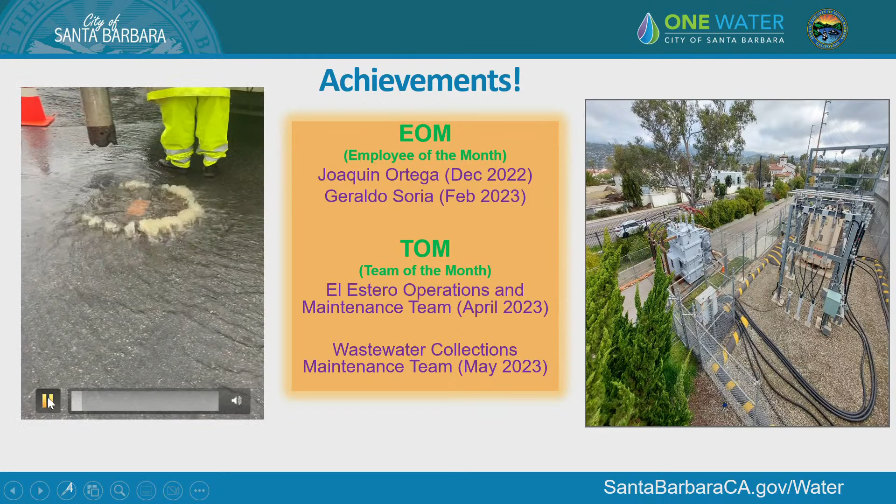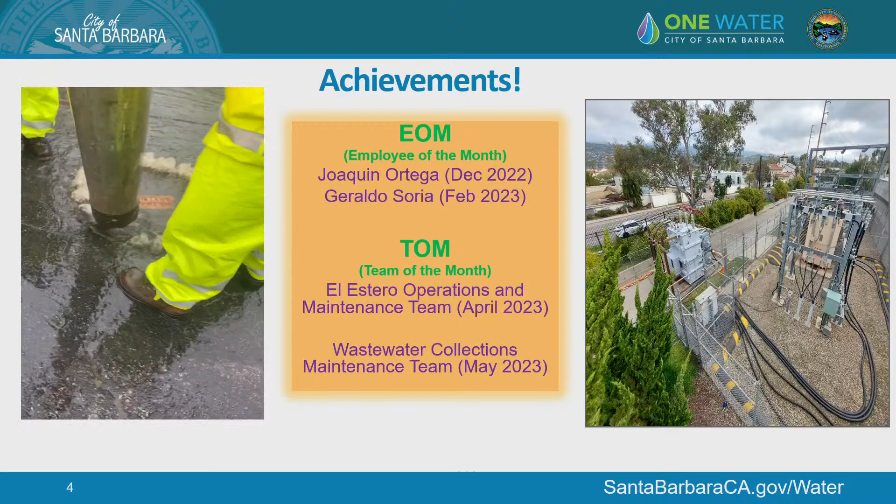Also, what we celebrated in May was a lot of the collections team and what they experienced over the three months of consistent rain. This is a video of what one of our storm drains looked like on January 9th, showing what they had to deal with when the De La Vina Creek, right next to De La Vina and Vernon, was overflowing. We were getting impacted, and our crews were out there every single day making sure we vacuumed up everything, any kind of discharges—but mostly at that point it's just rain flow.

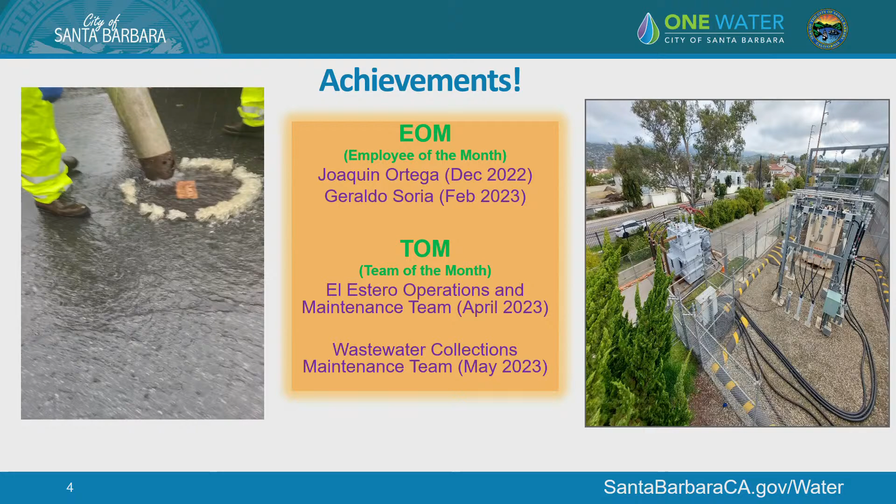All right, so now I will turn it over to Thomas to speak about our wastewater treatment. Next slide, please.

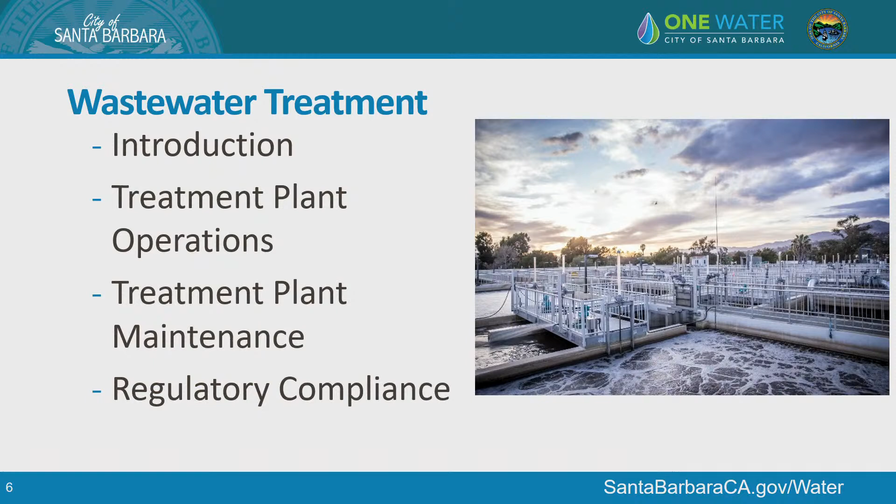The presentation today, I'll be covering a brief introduction, talk about a little bit of our operations and maintenance programs, and our regulatory compliance.

So we went over the treatment process diagram last year. I don't know if I want to spend too much time going over that again, but I just got to tell you, that's a great diagram. I mean, absolutely go over it, because when I got to the report and saw that, I just went, wow, I love that diagram. Everybody needs to understand what happened, so please. Okay, I'll go over it then.

This is actually a modified version of our main SCADA screen, and the operators use this to interface with our control system every day. We've just cleaned it up a little bit, removed a lot of the numbers to make it more clear for the presentation.

Across the top of the screen, going from left to right, is the liquid train of the treatment process. We have our influent pump station with our headworks bar screens, where we remove all the inorganic and trash material before it comes into the plant. Then it goes into our grit chamber, which is an aerated tank that helps remove very fine silt, gravel, and seed-like material that our aerobic and anaerobic bacteria cannot digest.

Then it gets into the treatment process and goes into our primary clarifiers, which are just settling tanks that allow the heavy material to sink and the light material to float. With that, we can remove probably half the material coming into the wastewater plant.

None of this would happen without them, and I'm just really thankful.

We've had a lot of changes in our maintenance team this year. We had a promotion for a new maintenance supervisor. With that promotion, he vacated his planner scheduler position, so we hired a new planner. The new planner vacated a technician position, so I had to hire a new technician. So there was kind of a progression of vacancies, and finally this last week we got back to full staffing in our maintenance team. I'll talk a little bit more about how that's affected us later in the presentation.

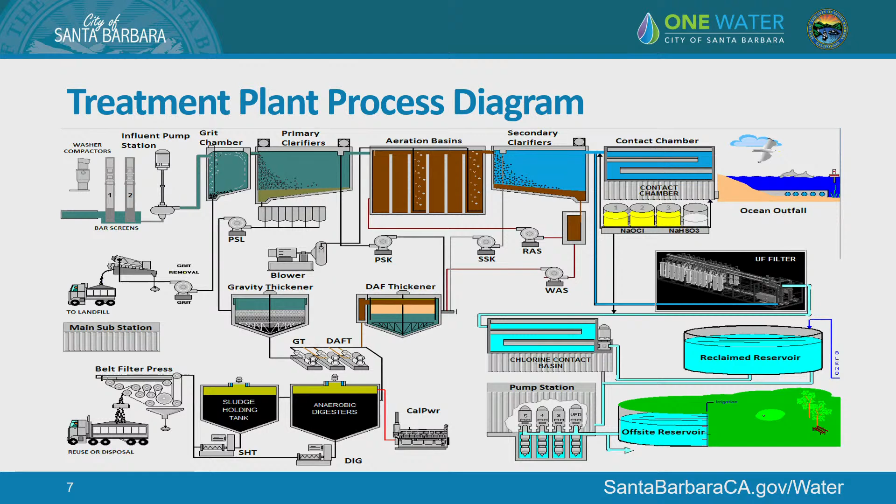So you can go to the next slide. We're on slide 8 now. In addition to operating and maintaining the treatment plant, the maintenance group is responsible for operating and maintaining the 7 lift stations in the community.

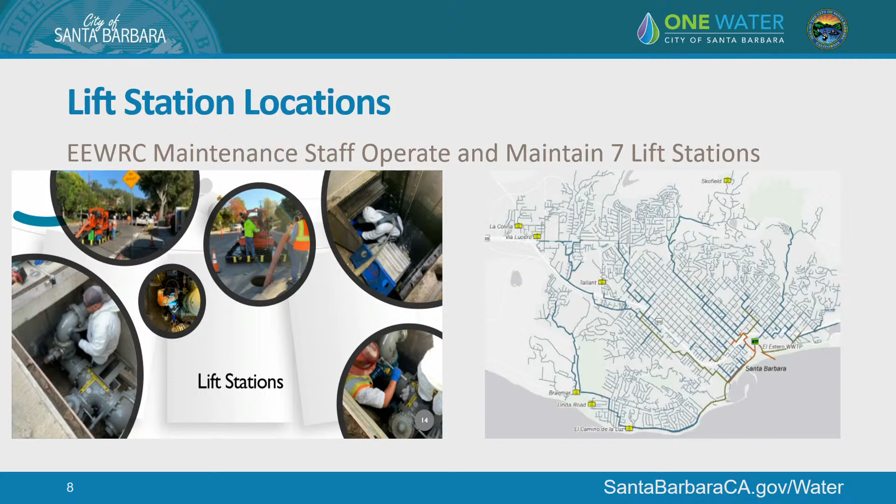Some of these are as small as a 4-foot little wet well in the Samarkand neighborhood, to the Braemar pump station down near Arroyo Burro, which is our biggest lift station, with 2 12-inch pumps there.

So we've seen very high strength solids coming into the treatment plant, and while we are designed for 11 million gallons per day, we're right now only receiving about 6 million gallons per day. I was just looking at a comparison for the first quarter of 2023, that was July through September of 2022 - we treated 5.84 million gallons per day. This same time this year, we're up to 6.21. That's just because we're still getting some infiltration and inflow into the collection system, which, as long as it's not overusing my capacity, is good because it helps freshen up the wastewater a little bit.

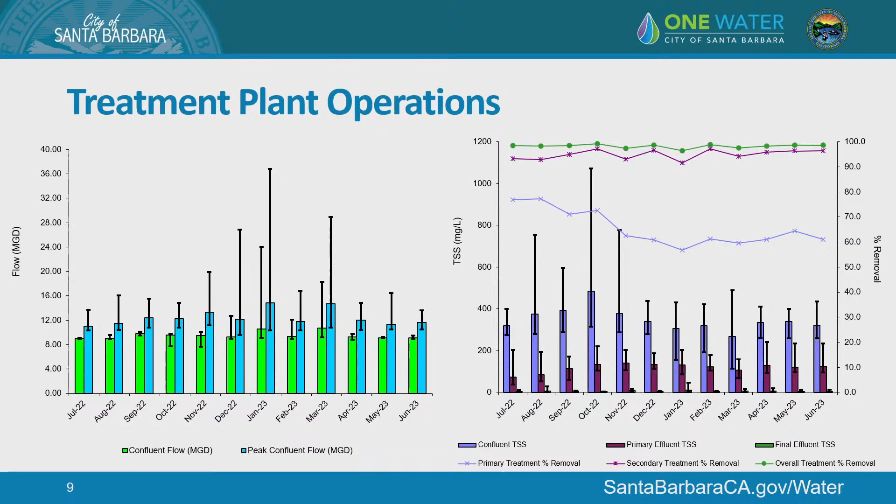Next slide. So with these declining flows resulting in a more concentrated influent stream, it makes the wastewater more challenging to disinfect. Our entire treatment process is physical and biological, with a small chemical portion at the end for disinfection. When we have septic influent, which is anaerobic, it changes the constituents of the solids to be more dissolved and harder to digest. It makes our treatment process more difficult, resulting in us using more chemicals, more energy for air, and sometimes water quality issues.

So one of the things we attempted earlier in Q2 was a nanobubble pre-treatment pilot installation from a company called Moleaer, and they're on like the cutting edge of technology with this. Unfortunately, our pilot started in November, and with the rains in January, it completely changed our operating conditions. So our pilot project, we were not able to get really statistically significant results - we had too many process control changes to make broad assumptions on the effect of their treatment process.

So we are still in conversations with them. There are a lot of other agencies in the nearby community and in the greater state that are also communicating with them, because we are not the only ones dealing with this hard-to-digest, high strength influent flow issue.

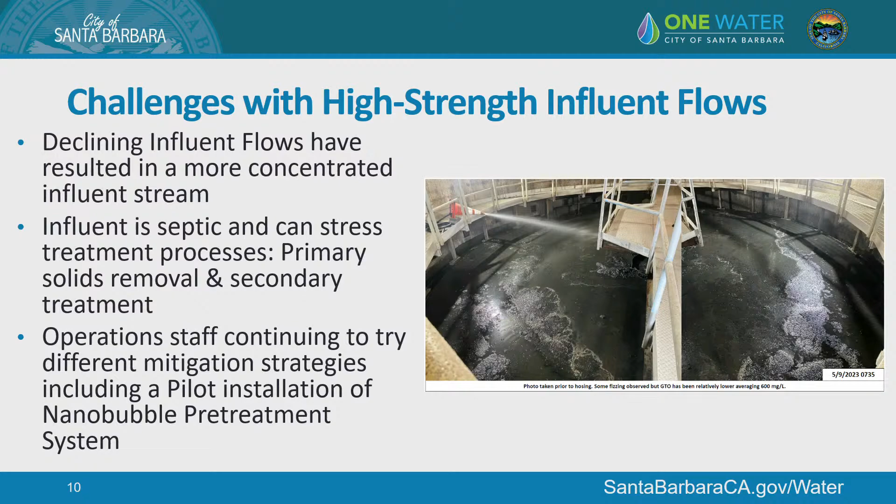I had a question about mitigation strategies, and this might be a totally stupid question, but are there options to blend either recycled water or the wastewater effluent with the influent to dilute it, or are they dilution strategies at the beginning of the process?

Yes, we actually have a secondary effluent return system, thank you for bringing that up. It was installed in the 2019 upgrades project, and that was more of a hydraulic mitigation strategy because of our very tight footprint at El Estero. We don't really have room for an equalization basin to help balance these flows. At night we return up to 3/4 of our flow back to the headworks to equalize that flow. That does help reduce septicity once it's inside the plant, but it doesn't help the flow coming into the plant. So there are some emerging technologies we're keeping an eye on to see if we may be able to mitigate and improve this wastewater condition before it gets to the treatment plant.

Thank you, next slide please. So this is just from the county's hydrological webpage. I think I was opening this tab 30 times a day during the winter just to see what was going on. But we could see, this is from the county building, we had that January 9th storm, 6 inches of rain in Santa Barbara. We can go next slide.

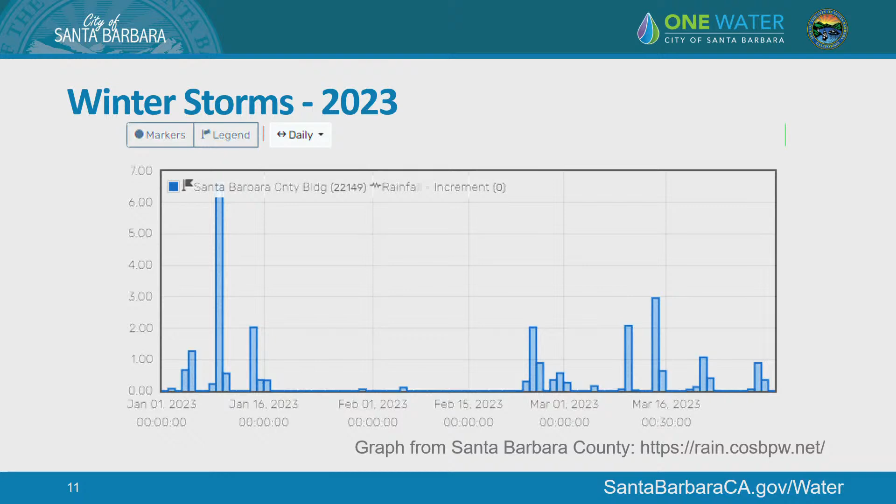So in preparations for these winter storms, our collection system is a sanitary system, so we're not a combined sewer system. We should not be seeing significant flows, but unfortunately we do have some I&I issues, and those result in a lot of concerns for us.

We are right next door to Laguna Channel, so you can see in the middle picture that's one of our flood walls. This is a technology that's used in Europe and other areas, a deployable wall that we use to protect our low-lying areas of the plant, like our emergency generator building, so we really don't want it to flood. So we preemptively load up the flood walls.

The bottom left picture shows our clarifiers during a high flow condition, where you can see the effluent flow goes over those V-notch weirs into those troughs. That's a picture of us during peak flow. The troughs are completely submerged, and we were at our hydraulic capacity for over 12 hours. We had all 4 of our influent pumps pumping every gallon of water they could out of the sewer system for 12 hours straight, and we had to restrict flow coming into the plant because our station was starting to flood inside the pump station.

On the far right, we also have issues with some of our lift stations. That's at Linda Road on the Mesa, and that station's pumps were not able to keep up with the incoming flow. This is something we've been able to work with the collection system crew on, and we gave them notice that this station was really having issues maintaining flow in the winter, and they did some smoke testing earlier this year. I hope I'm not stealing your thunder, but they do the smoke testing to look for illegal connections that might be contributing I&I to our pump stations, because those pump stations are our bottlenecks in the system. Luckily, they're only about less than 10 to 15% of our flow coming into the plant, but in those localized areas they can act as a bottleneck.

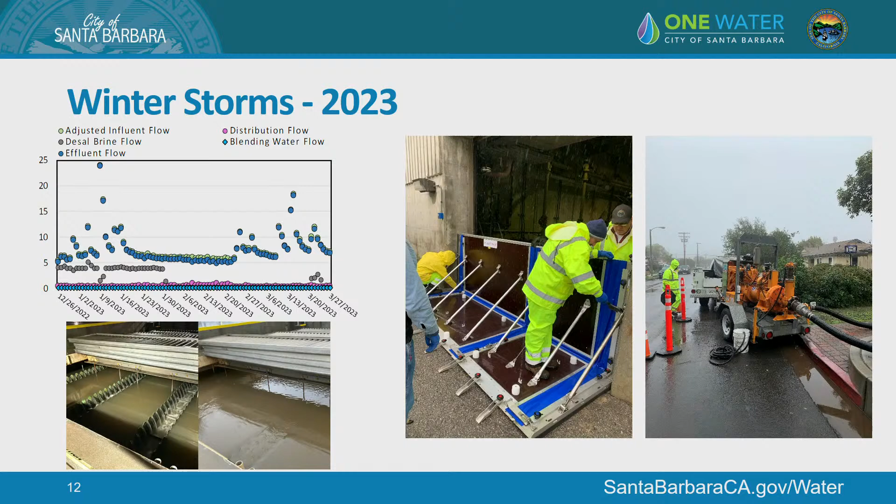You can go next slide please. So Amanda kind of touched on our Edison transformer failure already. What she didn't fully lay out was that when this went down on March 9th, we had been experiencing blower issues for the week before, 3 or 4 days before. Our aeration blowers are 900 horsepower electric motors that provide the air and oxygen that drive our biological process, and 2 of our 3 blowers failed. Our first blower failed earlier in the week, and our second blower failed on Thursday. So we were troubleshooting this thing, trying to figure out what's going on. It was giving us an electrical fault we'd never seen before.

In hindsight, we realized it wasn't the equipment that was failing, it was the source power that was dirty, and the blower was failing to protect itself so it wouldn't get damaged. Once the power completely went out, we put 2 and 2 together and realized this isn't our equipment failing, this is dirty power coming into the plant, and it was the death throes of the transformer that was causing those failures. So we were on our 2 megawatt diesel generator for 6 days straight, using about 1,000 to 1,500 gallons of diesel per day to power the treatment plant, to put that in perspective of that relative energy use.

The first night was very stressful. We had some lack of communication with Edison, but once we got the right people in touch with each other, Edison was very supportive, very helpful, and they were able to get us a replacement transformer in 3 days on site, and it took them 3 days to get it connected.

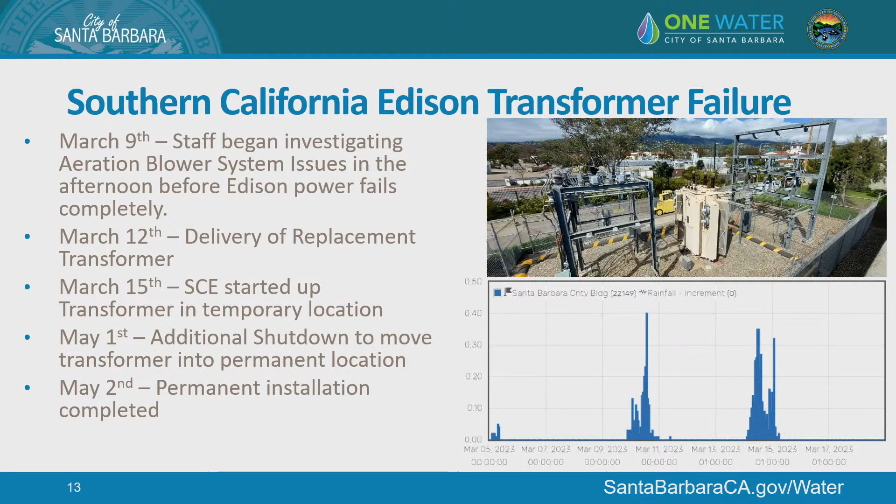If we can go next slide and just show this. I have some pictures of the delivery of the transformer coming on site. I believe it was at least 20 tons of weight, so that's an oversized load. We had to do emergency permits with Caltrans, so we learned a lot going through that. That's not something we do every day.

And then Edison's crew had the most specialized forklift I've ever seen. It's one that the whole thing extends, and our forklift has a heel on the forks that's maybe 1.5 inches thick. This forklift was 6 inches thick of steel to pick up that heavy device, and their crew was very large. They didn't always know each other - they were all from different departments.

But it all came together extremely quickly, because we had rain during these events, and you cannot do high voltage electrical terminations in rain. So Edison was shoehorning these repairs before and after these rain events, and even ocean fog is too much humidity to do these high voltage tests. So we were very fortunate that we were able to get the transformer back online and get off our generator with no harm, because that generator is also a 25-year-old generator.

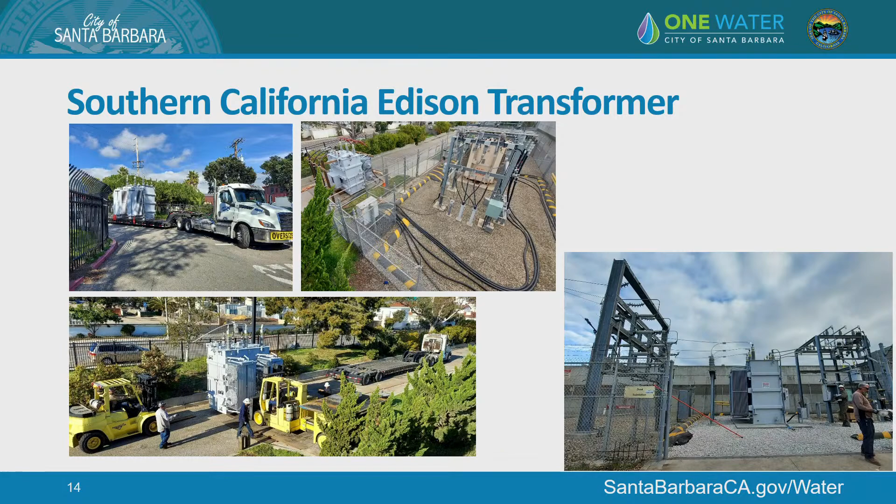A question for you. So we have backup generators that run on diesel. Can we run those indefinitely? We can run those as long as we have an emergency condition. We have a permit with the Air Pollution Control District, and there's a limit to hours for non-emergency use. But when we're in an emergency condition, we can run them as long as we need to.

Perfect, thank you. It was interesting last September when we had that heat wave, you may recall that. There was a temporary time period where they did suspend the limitations on generators, because they wanted to try and get as much as they could off of the electrical grid so they didn't bring the whole thing down. But it's a very unique circumstance. Typically we sparingly use the backup generators - we do our testing monthly, and then of course when we have an emergency situation.

Very infrequent use. Do we have a backup to the backup? No, that is exactly why staff were there 24/7 when we were running the generator. We had full-time shift coverage because there was no backup to that. And that's why it was fantastic - our Public Works Director was heavily involved in that too, and we got the upper SCE folks involved. Once they understood the gravity of the situation, it was quite impressive what they could mobilize. So it was helpful.

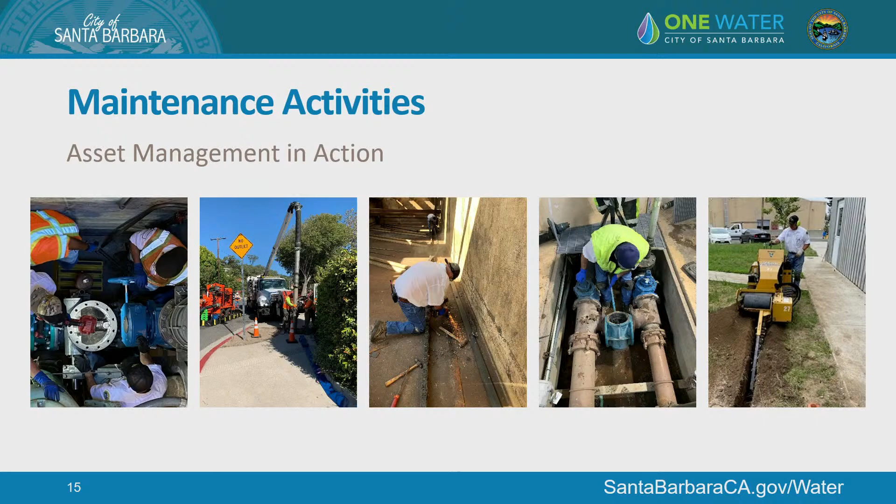And then on the far right there, we're running a new recycled water line, and this is something that we normally wouldn't have done in-house either. We're running a new line to one of our buildings to try and move some water that was in potable/industrial water to a recycled water use to try and aid some more conservation efforts. So we can go to the next slide.

Just briefly on our compliance issues, we had 2 exceedances of our permit limitations in fiscal year 2023.

One exceedance was an effluent coliform daily maximum limit, a biological test that didn't correlate with any other process parameters we could see. It was a 1-day spike and everything returned to normal the next day, which is a challenge with bacteriological tests because you're growing bacteria in the lab and seeing what responds. We suspect there might have been some contaminant, but because we couldn't pinpoint anything, we did report it as a violation.

The other exceedance was on the January 9th rainstorm. We exceeded the total suspended solids we were allowed to discharge by weight. We met our concentration limit, but because our flow was over design capacity—we treated 21 million gallons per day versus our normal peak design flow of 18 million gallons per day—we exceeded the total suspended solids by pounds for that one day, even though we met our concentration limit.

We also had two monitoring violations this year, both with recycled water. We've had a consolidation of our permits recently, which caused a couple hiccups with sampling frequency and analysis frequency. In Q2 we grabbed the sample but didn't analyze it, and in October we had a fouled sample tube. So we've had some new retraining opportunities to get our operations and lab staff working together better.

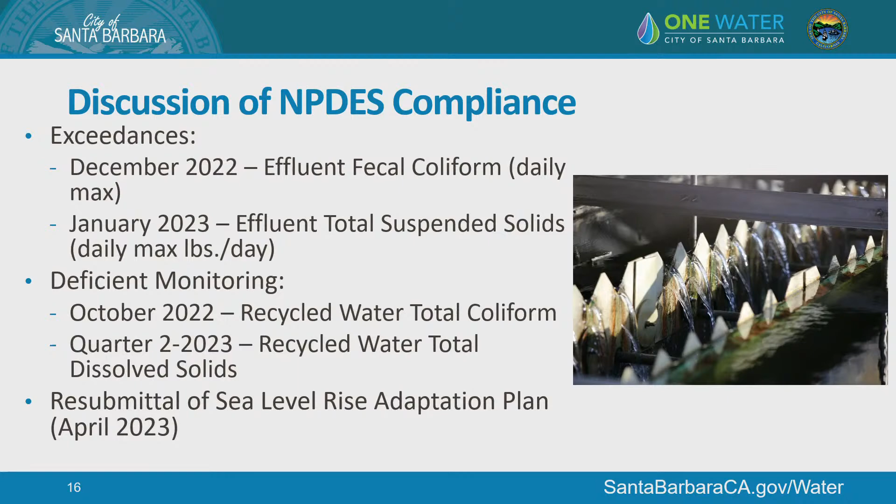Lastly, we resubmitted our sea level rise adaptation plan in April 2023. This was due in April 2022, but the state required an update of our local hazard mitigation plan, which was not previously submitted because it was not complete. Once we got that updated local hazard mitigation plan, we were able to resubmit the report and meet every requirement within that permit.

Next slide, just a preview for the fiscal year coming up. We've started replacing our electronic O&M manual, which has all of our SOPs, vendor manuals, process descriptions, and troubleshooting guides. It's really the Bible for the operations staff.

That manual was on a 10-year-old software platform. We worked with IT this year to select a new software, and we've moved to the city's internal website. That's ongoing this fiscal year.

We're replacing the membranes for the recycled water. I have a delivery estimate of November, and we'll be replacing those in-house. We bought the modules with capital funds, but the installation will all be done by city staff.

And then lastly, we're continuing our SCADA server and workstation upgrades, and hopefully I'll have an even better, cooler graph for you guys once our screens are all redone. Thank you.

Any questions on the treatment side before we move on to collections? Thank you, that is an incredible presentation.

I just have a question about the biological processes, when you have alternating drought and severe storms, climate change and more rapidly changing extreme weather events, and also the time of year when we have many more visitors versus other times—fluctuations not just within the week, but seasons.

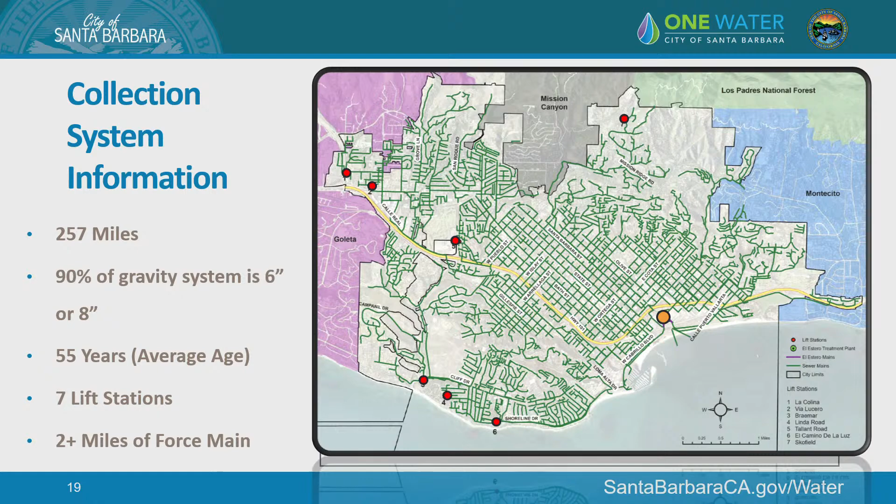Brief overview: 257 miles of gravity system, mostly 6 and 8 inch, so very small, and our 7 lift stations. We are also a very aging system, so a lot of cracks, rehabilitations, and repairs are required. We have right now 2 miles of force mains, mostly from our lift stations, meeting up with our gravity system.

This year, we had an unfortunate year with all of the rains. The majority of our overflows were from January 9th. However, we did have some issues with the team.

At the beginning of the year, we did not have enough staff, but throughout the year we were able to gain more staff and really train them. They got a lot of training between January and March, which was good for the new staff. You could tell in the data that in the beginning we had a little more spills because of the short staff, but now you can tell we're getting our staff up to speed, cleaning more, and addressing more items.

We did meet our goal of scheduling pipes at an assigned cleaning time, hitting 84% of that. A lot of our pipes also got cleaned during those storms, which helped out quite a bit.

I would also like to highlight our fats, oils, and grease program. Our pre-treatment coordinator does a fantastic job working with a lot of restaurants in the downtown area and all over Santa Barbara, getting them into compliance and reinspecting them, which helps quite a bit.

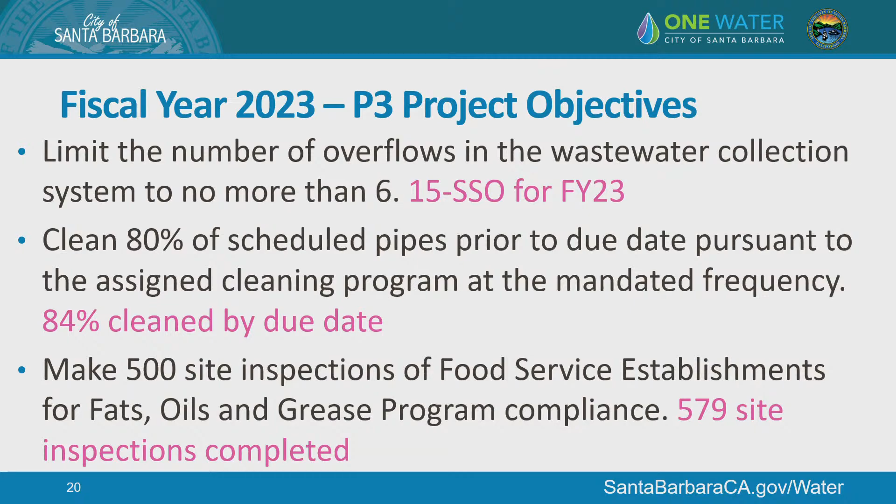A question for you: I read in the report that at times you put chemicals into the lines to clean them. So my question is, how does that affect the treatment plant when those chemicals come down into the plant itself, if they do?

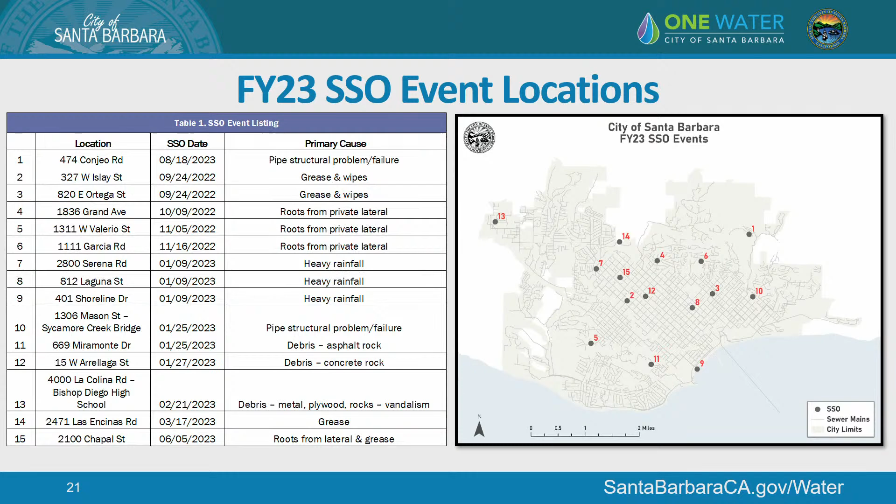Okay, we'll address that. So the SSO events, we look at those in detail because that data tells us what we need to know. We see a lot of grease, wipes, roots, and rainfall issues. Is there a problem with the pipe? Is it grease? That really explains where we go with our programs.

We did have a few vandalism items as well, and that does tend to happen, especially when people think the sewer system is also a drainage system, so they open up the manholes thinking they can drain their areas. We see that a lot, but we're gathering data to track it down and address that behavior, maybe by putting in locking manholes or whatever it is we need to do.

As for our cleaning programs, all of our sewer system mains are in the cleaning program in one way or another. We also have an acoustic program which helps us identify any blockages quickly and easily. If we get anything acoustically, we'll send a CCTV camera down there to really see what's blocking the area.

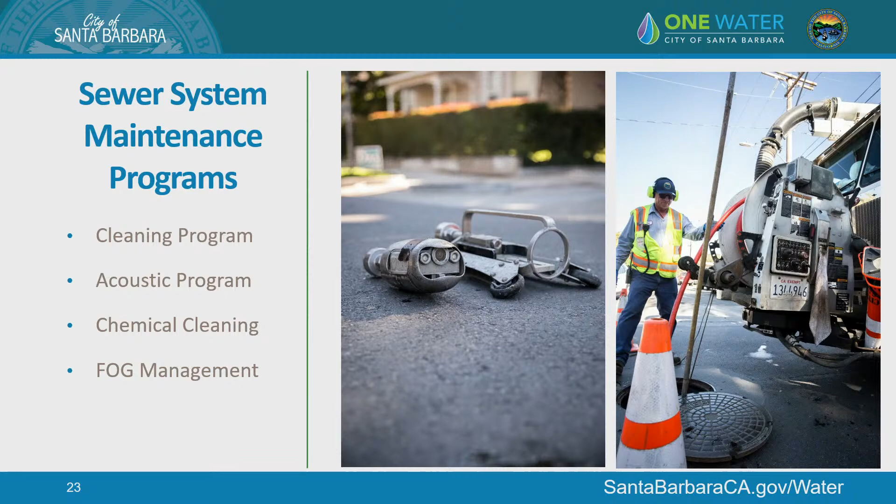Then of course there's our FOG management program, our fats, oils, and grease program, making sure that when grease gets into our system—because it's kind of like concrete, it solidifies and becomes really hard to remove—it catches a lot of debris and causes blockages and potential SSOs.

For our cleaning program, I want to point out that we are really trying to make strides to reduce these multi-year cleaning frequencies, and that is our focus. We worked really hard to increase our once-a-year cleaning program, addressing items that require multiple cleanings per year through other programs like accelerated root control, CIP, or smoke testing, to try to identify what is causing the frequency of these cleanings.

If we are able to get everything on a 12 to 60-month program, then we're very successful and can maintain our cleaning program with the staffing that we have. But the more we have to clean the frequency, the more staff that requires.

Just to give you an idea of what that looks like in the downtown area, it's very flat. You get these flat lines, things start settling out, and in order to make sure that never turns into a blockage, we're having to come in there twice a year, 3 times a year, 4 times a year, and clean those lines. What's difficult is there isn't an easy solution. You can't really change the grade without major ramifications upstream and downstream. But we're trying different ideas, potentially pipe design and size, to keep velocities going so things don't settle out. But then again, you lose capacity during wet weather events. So it's a tightrope, and that's eating up a lot of our staff time, just babysitting some of these higher maintenance lines.

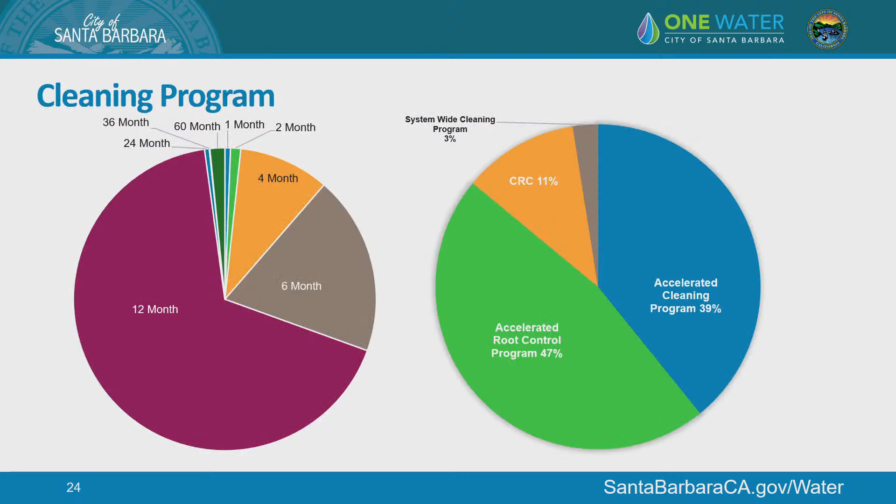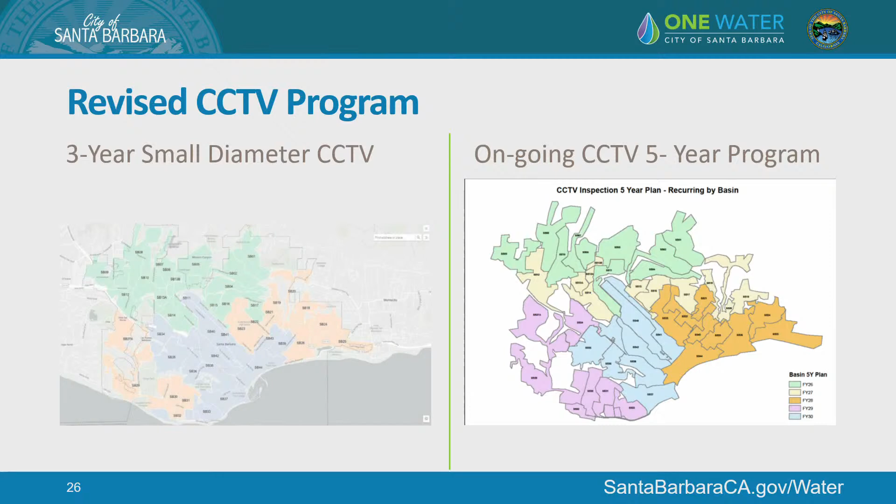I just wanted to go over our revised CCTV program real quick. On your left is the 3-year small diameter CCTV program that's currently going on, and that'll get us to a baseline. On your right is the ongoing 5-year program that will be implemented, so each area is on its own year of being CCTV'd. This makes sure our entire system is CCTV'd every 5 years, so we're up to date in our data, which will help us make better decisions and better priority lists for our capital improvement program.

And what that really goes into is it helps our CCTV. This also helps our revised cleaning programs, and we would really like to move to that basin cleaning approach and make it more systematic instead of reactive.

Other capacity programs, we're addressing capacity by implementing more smoke testing. And we are lucky that we did our I&I, we had a bunch of flow monitoring within our system, so our model is up to date, and we're able to use that with our smoke testing, which helps with our maintenance repairs and our capital CIP.

I just wanted to add to the staff development and training, as Ms. Leslie was mentioning. We had a lot of turnover in the collections group, and it's really challenging to maintain a system of this complexity with that kind of turnover. We recently looked, and we're about 17% below market on what we're paying our collections operators, which is compounding that issue. Obviously the commute, the housing situation, it's a really difficult situation, and we are working to address that, but it's complicated, and it compounds morale when you're training someone and getting them up to speed, and then they leave because they find a job where they get paid better, don't have a commute, or can buy a home.

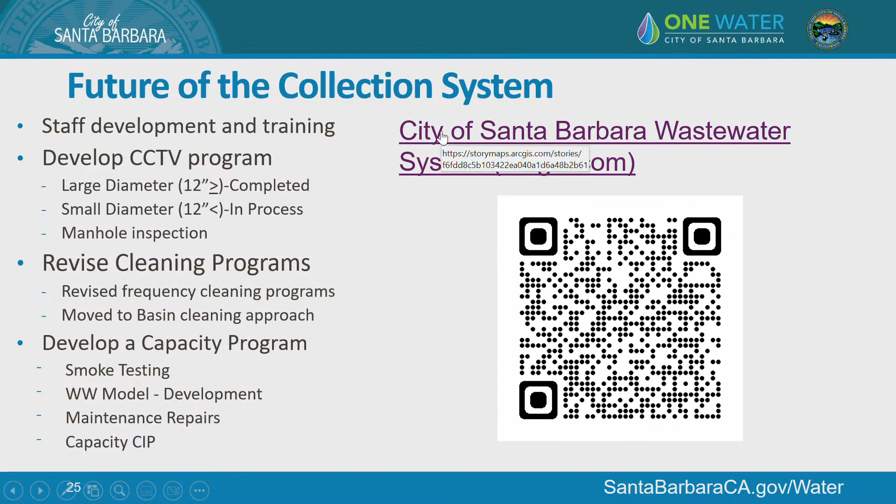This tells you everything you need to know about our collection system. If you want more information about your sewer lateral program, the wastewater collection system, this is now turned on and available, and we have a QR code and link in it. It's a little story map of our wastewater collection system and our operations and maintenance program, so everything you need to know about chemical root control, where we're going to be applying it this year, all the maps that go along with it. We will be updating this annually, and it's a really great tool for us. We are able to get our GIS team to correspond with all of our up-to-date projects, our CIP projects, and our operations projects. So that's very exciting.

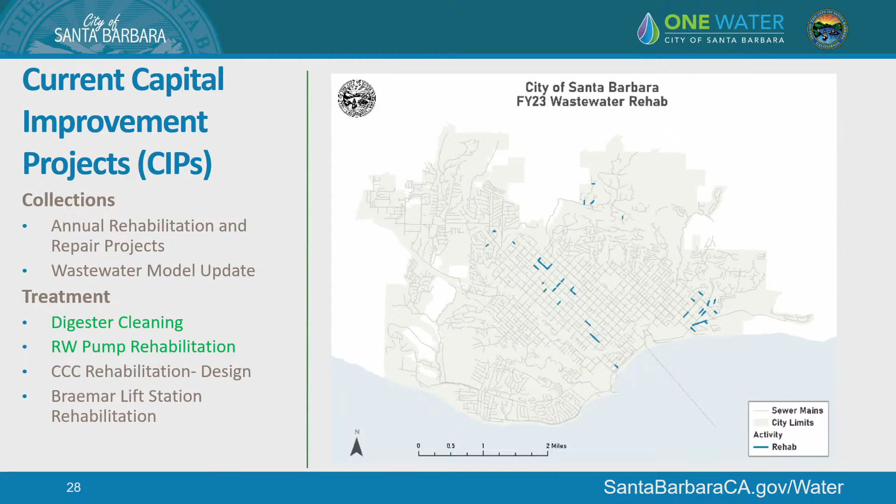What I want to highlight is, although we have these CIPs, it is a hand-in-hand operation with our operations staff and the contractor. We can't shut down, so we are constantly with them and support them the entire time.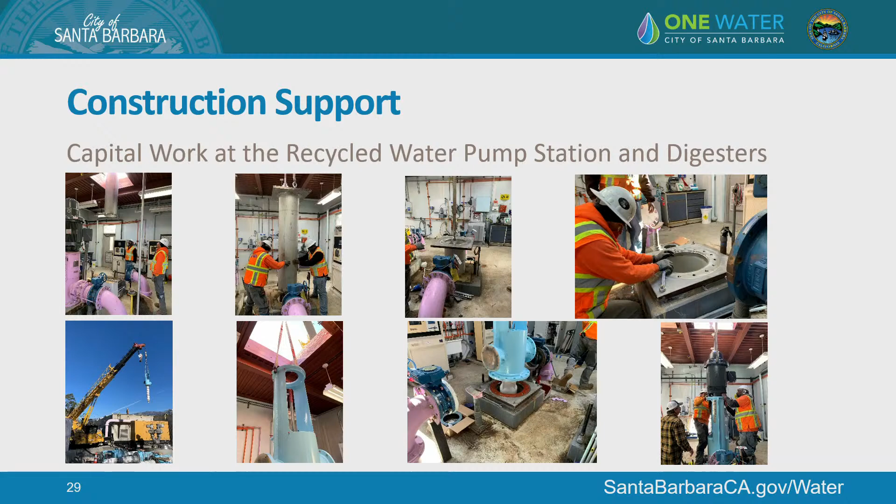Really the success of that project had to do with the coordination with the contractor and the operations, because we were down on one digester while we had half our capacity down. So we had one digester down out of our two for pretty much an entire year.

A question, out of plain curiosity: in the absence of oxygen, what is wearing, causing wear on the digesters, the anaerobic digesters? Is it just physical contact with material coming in?

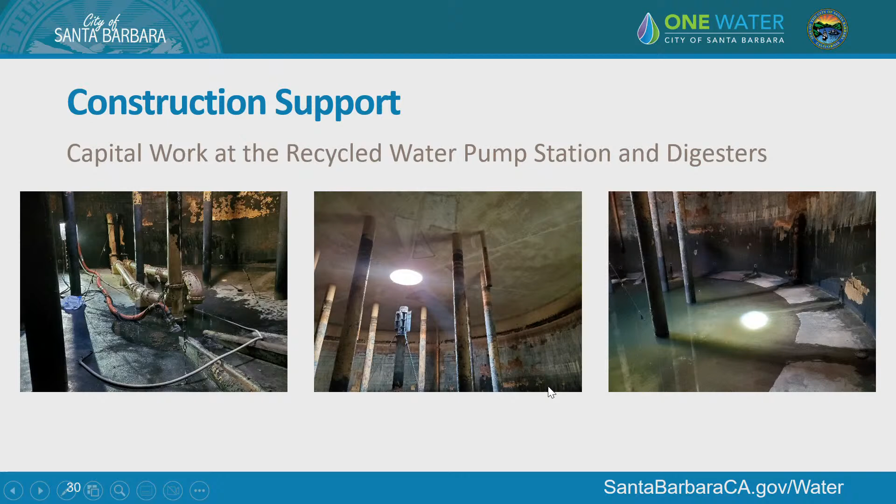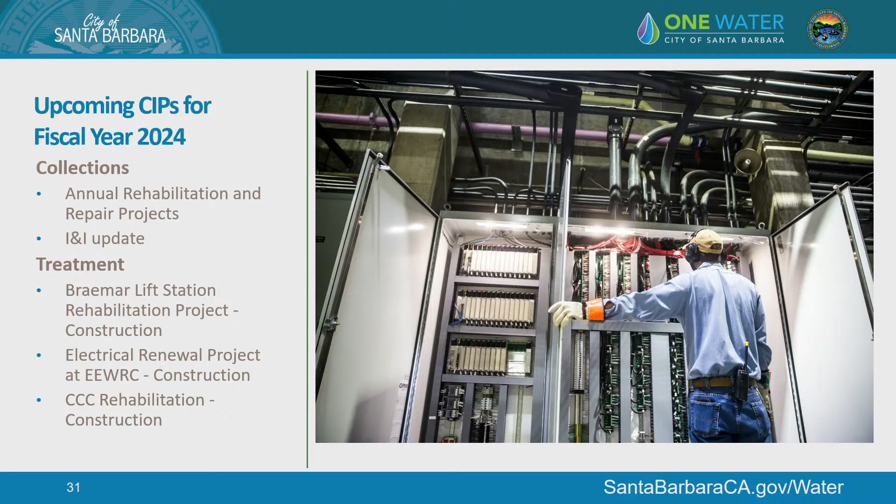Okay, upcoming: of course in our collections we'll have our annual rehab project and our I&I update. But for the most part, collections we'll be really focusing on smoke testing and repairing a lot of our emergency items that may come up. Treatment, Braemar Lift Station, that's going to be in construction. Electrical renewal, we just received bids and we're reviewing them now, so that project you'll be seeing in the next few months for award of contract. And the CCC rehabilitation construction will go out for construction early next year, so you'll see that construction as well. I think that's about it, if you guys have any additional questions.

Any questions? Well, thank you both so much for the presentation. Just incredible work happening all around.

Madam Chair, I'd just say, again, I found this report really to be very readable. It was a really well-done written report, and again I appreciate it. Over the years, I don't think I've appreciated as much as this particular report actually pulled out a lot of the activities in a way that, for me, was very educational.

So thank you, Commissioner Davis. We work on it quite a bit and try to revise it to make it readable and more presentable, and to understand what it is, the data that you're looking at. So we're always trying to fine tune it. We appreciate that comment, it's a success.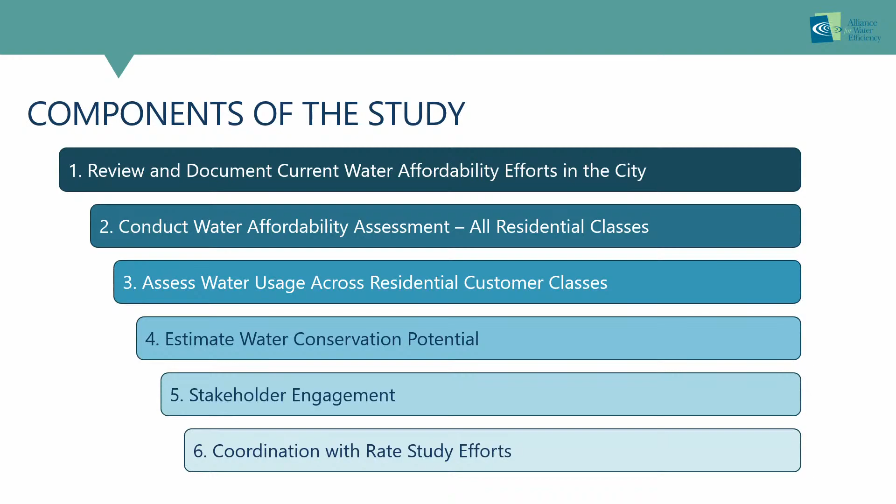So water affordability indicators, such as the household burden indicator, which we'll talk more about and use in our studies, can be thought of as a way to approximate the number of customers that might be struggling to pay bills and identify where these customers and residents are concentrated. This information can be used to create or refine water affordability programs or direct targeted outreach to help connect them with resources that might be valuable to them.

The cost of water really matters a lot to some households. It doesn't matter a whole lot to others, but there are some households where it matters a lot. The issue of affordability, incorporating equity into the work that we do, is getting a lot of attention and is increasingly required in the work we do at water utilities. And you all have a chance to play a positive role.

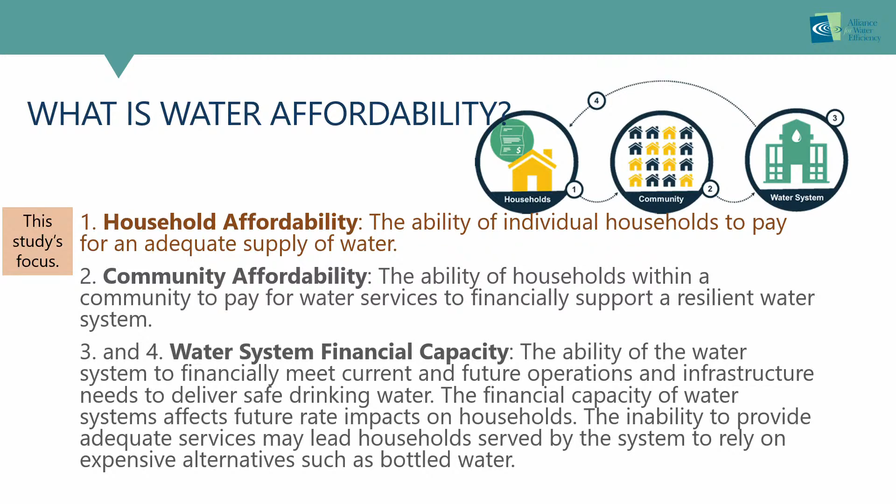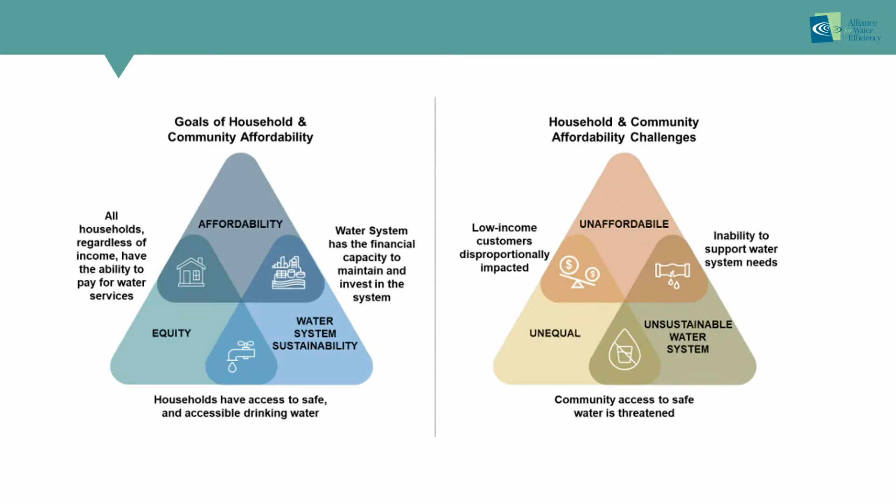So a little bit of grounding on what's happening in California. Of course we have AB 685 and 401. 685 establishes that Californians have a right to safe water. This ensures universal access to water, declaring that every human being has the right to safe, clean, affordable, and accessible water adequate for human consumption, cooking, and sanitary purposes.

We know water is increasingly more expensive to deliver. There's a lot that goes into it. You saw all of that from the wastewater side, and then, of course, there's even more on the drinking water side. The result of that reality is that more low-income households have the potential to be experiencing unaffordable drinking water.

401 is looking more at assisting low-income households in affording their drinking water, and it's one component of that human right to water in full. I won't go further into that, but there's been a lot of work on this, and they've been doing these annual affordability assessments, which started first with the singular metric of percent of median household income.

So how much a basic water service costs relative to your total household income over the course of the year - is it 1%? Is it 5%? Is it 10%? That sort of thing, focused on median household income, and I'll talk more about that in a moment.

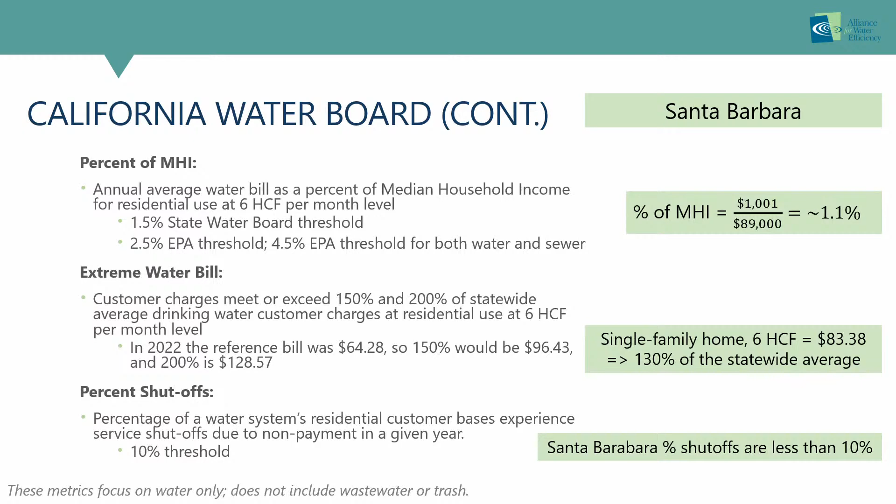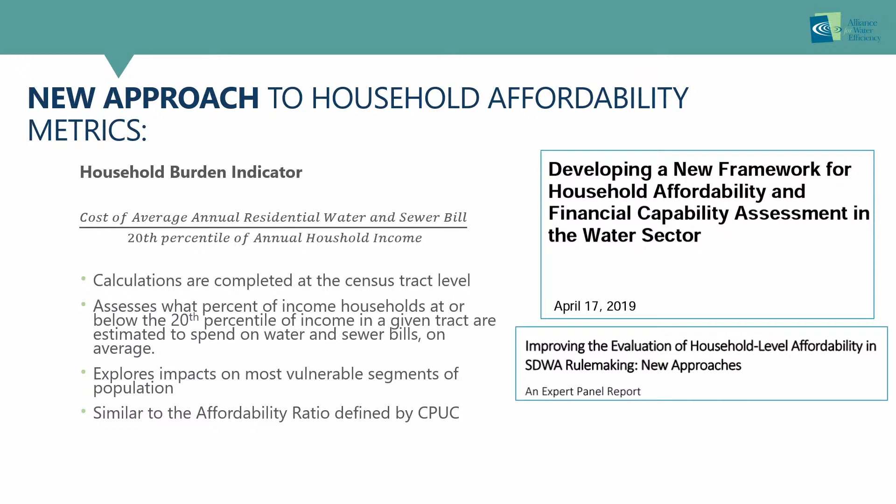All right. Let's get one moment here. Let me get it coughed out.

All right, let's jump into this. So a water affordability analysis.

Let's talk a little bit about census tracts, just to ground you on what the unit of analysis is going to look like for some of the work that we do. Census tracts are smaller units that have been around for a long time with census and data collection across the U.S. They're relatively permanent. Over time, they get evaluated, I think, every 10 years. They're about 4,000-ish people, so it's a reasonable amount of people to get reasonable confidence in the census data reflected at each unit.

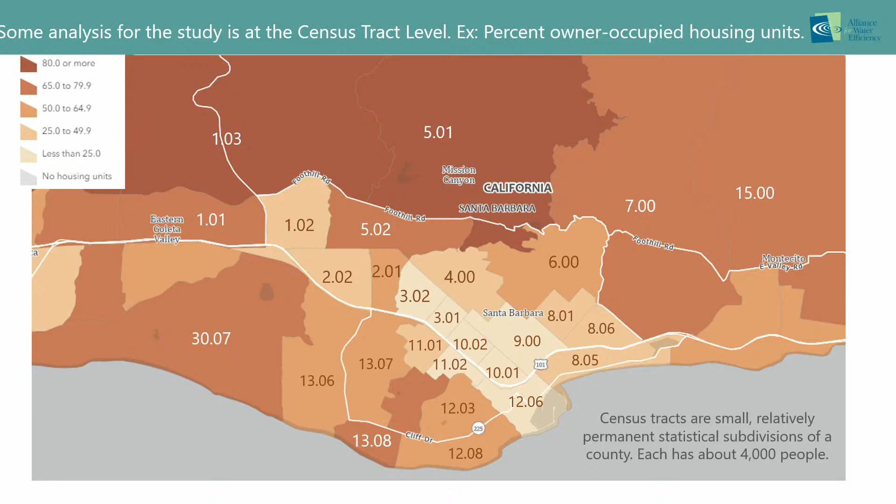Next slide. So how do we actually go about calculating that household burden indicator, and what data are we using to contribute to that calculation? I just wanted to walk you all through this.

Next slide. So in a given census tract, there's a whole bunch of different households in there. You all have provided billing and consumption data to us for each month for 6 fiscal years. We collect all of that data, and then we bring in data for that census tract from the census data. Next slide, please.

To walk you through a sample calculation: we gather and clean that billing data. Within that census tract, there's going to be a mix of single family homes, individually metered multifamily units, as well as master metered multifamily type buildings. For the single family and individually metered multifamily, we have their individual bills -- these are made up numbers, but annual bills, for example. Whereas in the master meter, we collect all of the bills for the associated complex and divide it by the number of dwelling units to get individual approximate bills per dwelling unit.

So step 2, we take all of the annual bills within that census tract for all the households based on the billing data that we have, and we divide it by the total number of dwelling units in the census tract. The Santa Barbara data really enables us to do this analysis and incorporate the multifamily data, because you all have that in data track. Not all communities do, so kudos to you all for enabling this and allowing us to dig into this and treat all residential within the study.

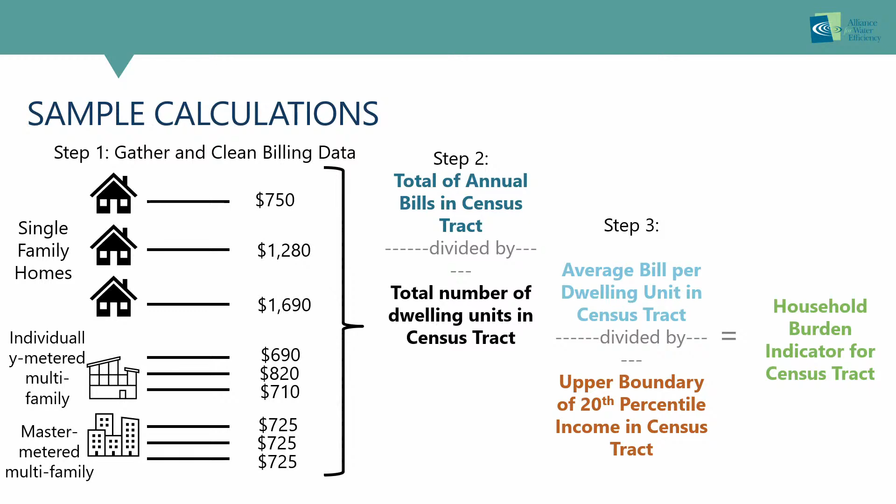Here you'll see a little draft mark up in the corner, just to indicate this work is ongoing. Part of the point of being here is to get your feedback on all of this. So here are a few nuggets.

So what does this translate to, how to think about this? If we use fiscal year 23, 4.8, the overall HBI for water, sewer, and trash means that households at the 20th percentile of income, about $45,000 on average across the different census tracts, are paying almost 5% of their annual income to water, sewer, and trash services.

Question: do you have the breakdown between water and sewer as well, or are those combined? Right now they're combined, but if that would be of interest for the study and final report, we could look at incorporating graphics and results showing the breakdown. I think that would be helpful, especially as we're considering the rate studies.

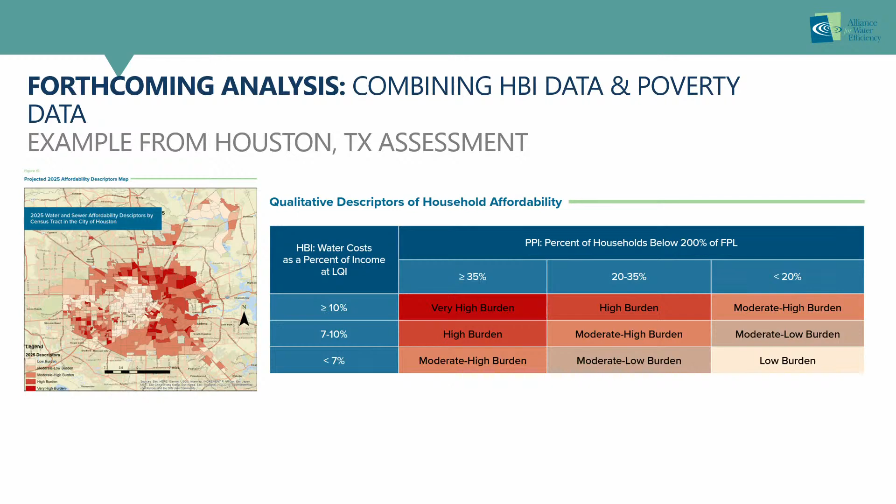So that would be forthcoming analysis, just to give you a sense of what else will be coming to you eventually. Next slide. And then we are looking at a variety of ways to slice and dice the data to help provide some additional insight into what's going on in your community, both in terms of water usage and bills, and just better understand the community and the data.

So here's a few examples. Would love to hear more about what you'd like to see. You'll see each of the next, I think we've got 3 slides total, break out the community into 2 different groups, and then we do a statistical test to compare the difference.

Next slide. This is looking at single family versus multifamily dwelling units. That multifamily includes both the individually and master metered accounts. And so you see quite a big difference there. Some of this is, of course, outdoor usage and bigger lots, bigger homes, but just to give you some initial sense of what this is.

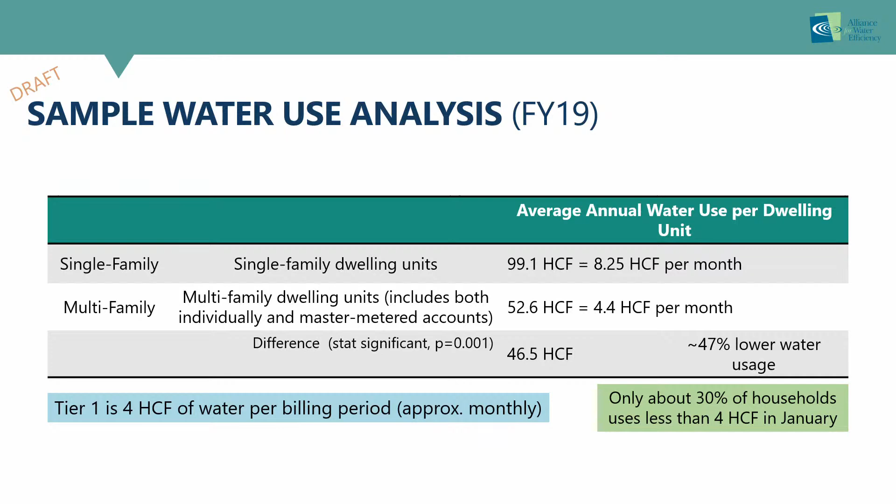And then the third one is just looking at census tracts - this is looking again at the tract level, at census tracts where 50% or more of dwelling units are single family versus those where it's less than 50% single family. And this is a smaller difference, in part because you've got mixed realities in each of these census tracts, but you can still see that water usage is lower where there's more multifamily. So I'll pause there - thoughts, questions, things you'd love to see.

So with these sample water use analyses, is the intention then that you would add the affordability metric into these tables, or how does the affordability piece come in here?

So the study we're working on is really merging lots of different pieces of data - the affordability piece, and also water conservation, which I'll talk about in a moment. Understanding overall water usage can inform both the affordability and water conservation pieces. On the conservation side, it helps us understand the capacity and potential to help those with higher affordability challenges leverage conservation as a strategy to ease that burden. On the affordability and rate side, it's about understanding, based on water usage, what actual usage looks like relative to the rate structure, and how the rate structure might help ease affordability challenges.

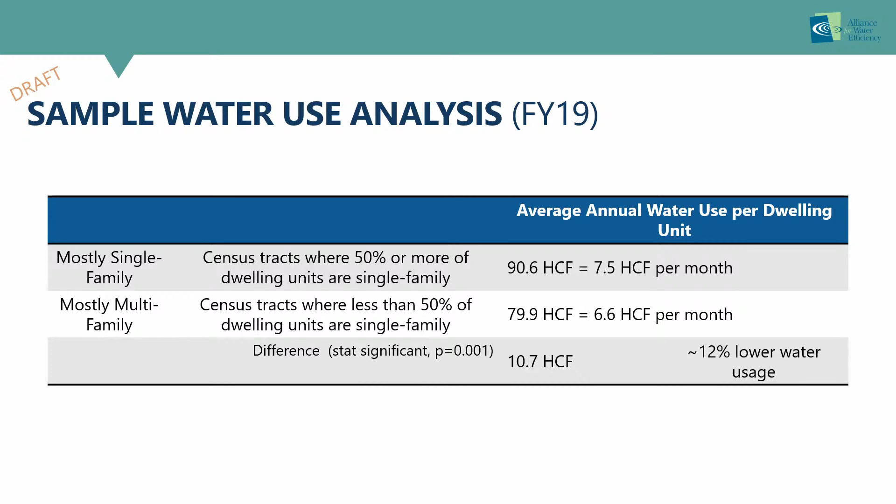Looks like she's got some more. Okay, I think we're ready to move on. Keep cruising then. So we'll have additional data.

We know that in addition to poverty prevalence, there are other aspects of your community that would be valuable for you to know how they're correlated and connected with water usage and the relative cost burden. So we're going to bring in additional information, like understanding where we have owner-occupied versus renter-occupied units, because renter-occupied presents a whole suite of other challenges in improving affordability potentially.

Understanding race and ethnicity - obviously there's a large Spanish-speaking and Hispanic population in the community. So understanding if that's at all correlated with potential challenges, where you might have older households that might have more limited, or what's the right word, stable incomes, so that as water costs rise up, their incomes might not necessarily be rising with them, making them more vulnerable.

And then other data that's interesting - we're going to be working on understanding where there have been concentrations of disconnects when you all were doing disconnections, and where currently folks are on payment plans, to help understand where these different populations are concentrated relative to where we're seeing concentrations of cost burden.

Question on that, connected to disconnections and payment plans - is it possible to also incorporate LIHWAP participation into this assessment? We could on our end if the data is available, for sure. Do we know if the data is available? We have some data available. We can provide that. That would be great. Thank you.

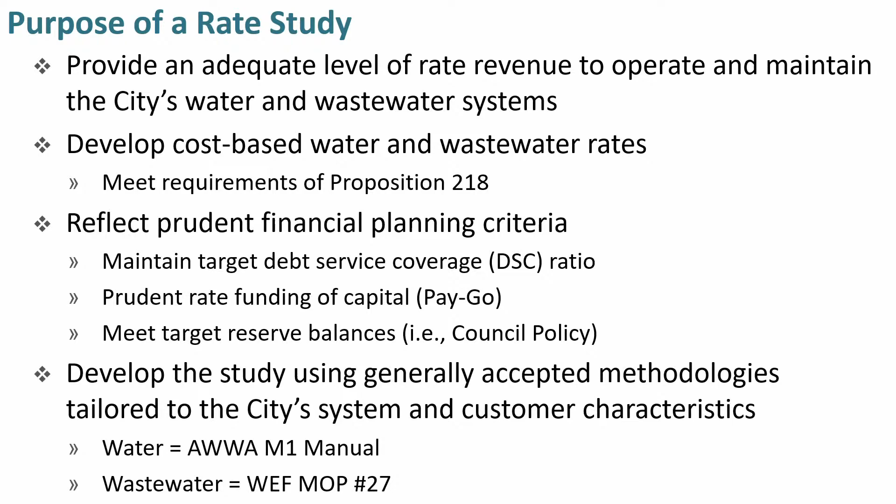On the next slide, we have a couple of our key—it's our overview of our approach. We're on the left-hand side here, we're in the planning phase, we're just getting kicked off. That includes our data collection and review. It's reviewing the financial policies and metrics that we need to look at that we've used in the past for the water and wastewater studies. And then we'll get into that technical analysis and the communication aspect of this with our reports, public presentations, and ultimately the models for city staff to have as part of that.

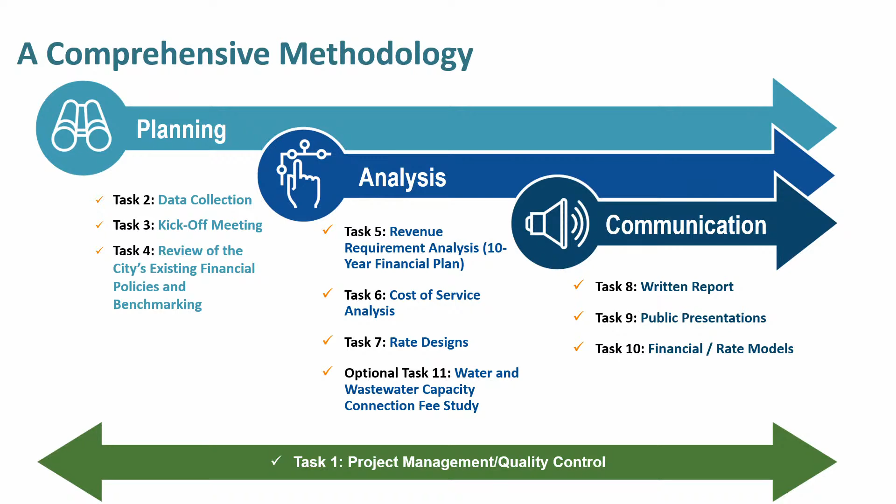And so, as I mentioned, we're working on the left-hand side here, but ultimately moving into this analysis phase fairly quickly. And then that analysis phase is really where we'll be able to incorporate some or all, depending on the situation and schedule, of the prior discussion on affordability, as well as we go through this process for water and wastewater. On the next slide, we have a summary of our process.

Remember, to meet our requirements of Proposition 218, we have to develop the cost basis of those rates, the proportionality of those rates, and ultimately design rates to meet that. And that's done through our revenue requirement, our financial plan, so determining what those costs are; our cost of service, which proportionally allocates and distributes those costs between a residential, a multifamily, a commercial customer for both the water and the wastewater utilities; and then ultimately design our rates to reflect the results of those two studies.

So as we go through this process, we learn more about the affordability challenges and approaches to address those. We really need to start building those into our cost of service analysis, as that becomes the basis for our proposed rates. We do have some ability to carry that into our rate design.

The big challenge that always comes up is the multifamily situation. How do we deal with those customers? We've looked back at that rate structure for multifamily customers before—are there other ways to develop that rate that would provide a benefit to customers? And how does that impact those customers if they're just paying rent and don't receive a direct water bill? That'll be part of the discussion as we go through this.

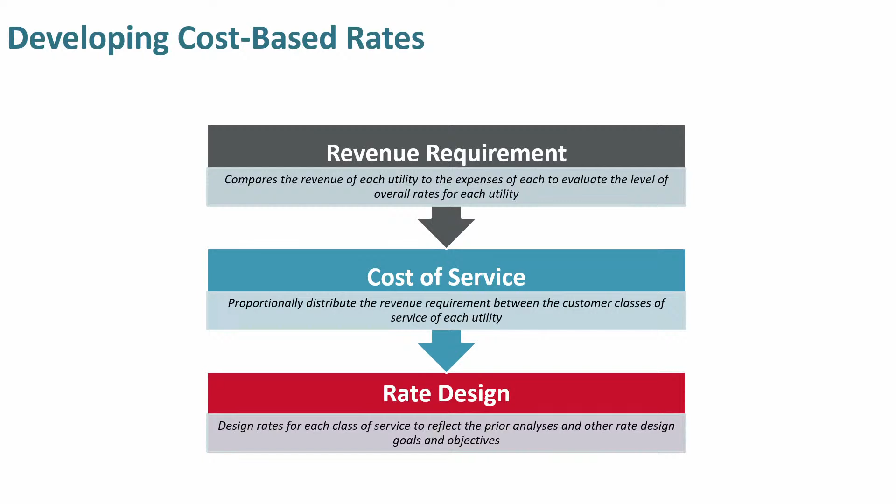Some key issues on the next slide, some already mentioned, but really it's cost recovery for the water and wastewater utility, coming back to proportional distribution of costs based on the costs incurred to provide service. So as we go through this, we're kicking off from where your current budgeting and actual costs have been this last year, then incorporating the inflationary impacts we've seen on the O&M side. You previously discussed some of the salary levels and how that plays into our overall costs.

Mr. Hagmark also noted the increasing cost of capital projects from supply chain issues, backlogs, competition for resources, etc. We've seen our costs skyrocket, and it's not just Santa Barbara or California—it's across the country as utilities try to accommodate the new normal for costs associated with providing these essential services. The affordability issues we'll talk about and bring into play as we go through this, and then we'll talk about our revenue stability and conservation impacts.

So how have the characteristics changed, more specifically on the water side, since our last study?

Yep, so much for that connection. Sean, are you still there? He's frozen. Yep, we've all been there. It looks like he's rejoining shortly.

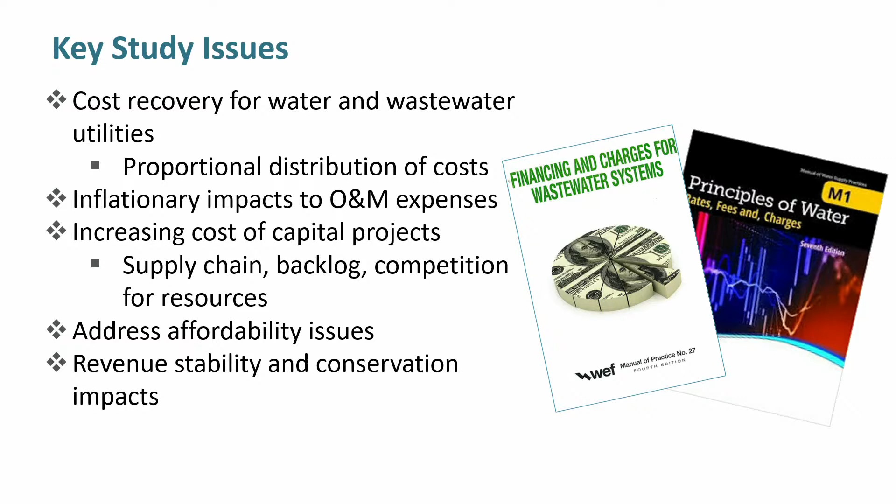So we talked about the revenue stability and conservation impacts. Our community does a really good job of conserving, so that's usually a pretty stable number there.

Moving on to our revenue requirement. We compare our revenues to our expenses to determine the level of rate adjustment necessary, and then we use prudent financial planning criteria for adequate funding of renewal and replacement.

We do look for SRF loans, bond options, grants. We look at everything that we can possibly get, because we understand that these projects are very expensive.

We also need to maintain our ending reserve balance. That is another topic we've had pretty in-depth discussions about, our reserve policy.

Then there is a review. We review a specific time period, typically 5 to 10 years. This rate setting process, we typically do 3 years. We're going to look at a 4-year for this one.

It does give you an opportunity to spread out. If you need to increase costs, you can spread them out over a longer period of time instead of being restrained to 2 or 3 years. You have a longer runway to get your rates up, so you may initially dip into reserves, but ultimately end up matching what your reserve balance is.

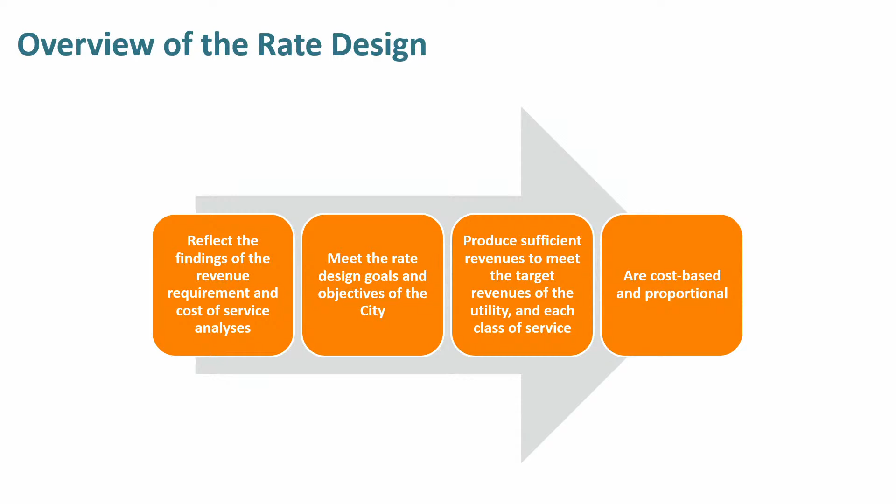Then ultimately we'll gain that feedback from you all and that recommendation from you all on how we move that forward. A couple of the goals—I put the next slide in more to highlight the middle one there, or the third from the bottom, the affordability side of this.

As we go through this, we're going to establish rates that meet the revenue needs of each utility. We've worked really hard over the past couple of studies to establish rates that are easy to understand and administer, as well as having that conservation-oriented rate structure. Our cost of service provides us with that equitable, proportional, and non-discriminatory based rates.

Now one of the new or focus elements this time is on that affordability side. In the past, we've built in the customer assistance program costs where you've helped some of your customers. How do we expand that? How does that work with the study you're just starting that you talked about previously, and how can we roll those into here? As Liesl mentioned, we're going to be coordinating on this as they work through their process and we work through our process to incorporate some of those goals and results as part of this.

The next slide has our next steps. As I mentioned, we're just kicking this off. We're getting into the data review, we'll be going through the technical analysis, and then coming back to staff and working through the Water Commission. Primarily January, February, we anticipate we'll be back in front of you all with those draft results, talk about those findings and recommendations, and gain that policy feedback.

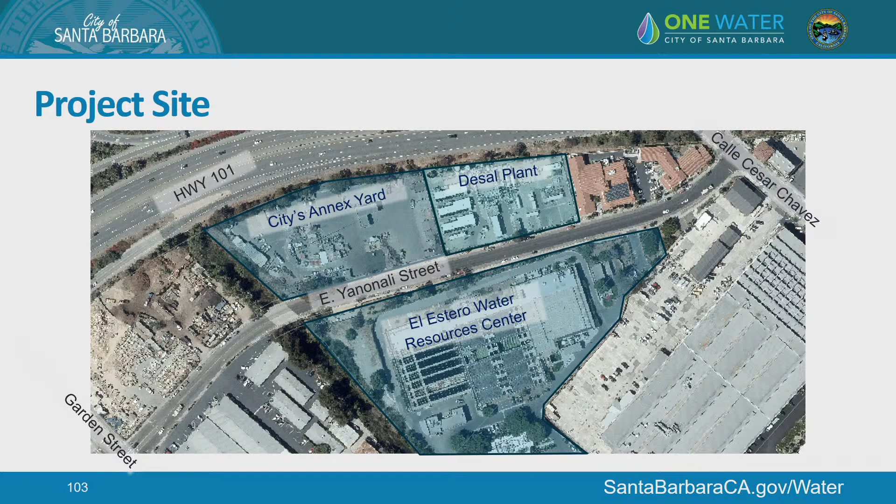I'd like to introduce the concept of what we're calling the Water Resources Operations and Maintenance Building. The site we're looking at has the capability to accommodate about a 50 by 150 foot industrial style building that would ultimately address a lot of the deficiencies the desal plant operations have been dealing with over the last 5 years.

We've learned a lot talking to the contract operator. One issue is the administrative space for both support staff and operators themselves isn't sufficient for the number of staff they need on hand. They also lack showers and locker rooms to provide for proper hygiene after a long shift.

These operators are running 12-hour shifts and dealing with chemicals on site. So having a locker room with showers where they can clean themselves up at the end of the day before leaving to go home is an important component of what we found from them.

There is a small on-site lab. I'll orient you in a second to where it is currently, but we would most likely be building an on-site lab into this new Water Resources Operations and Maintenance Building.

Material and equipment storage is currently being handled on the desal site through several shipping containers. It's very modular right now, and most of these containers are not climate controlled, so very expensive pieces of equipment are being put into places that should ultimately be a more permanent storage home. They also don't have an indoor maintenance facility, so maintenance often has to be done outdoors in the sun or cold weather.

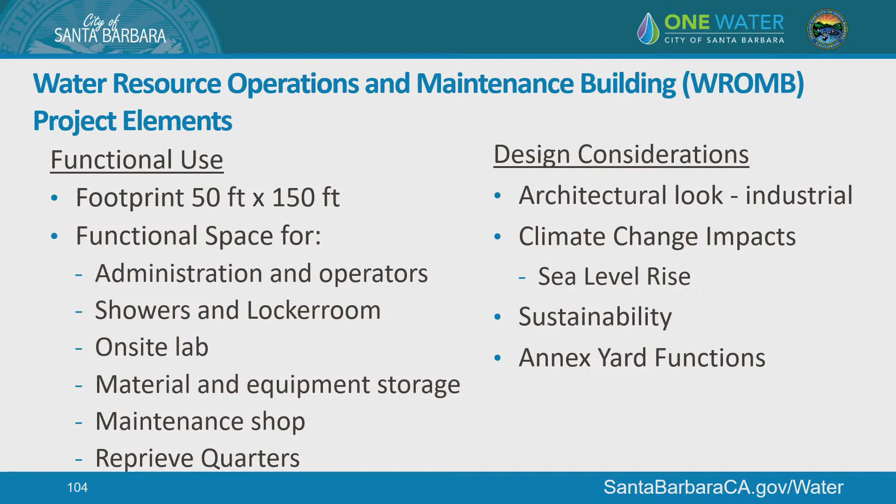Because of the location we're proposing, there are several annex yard functions we would have to offset, so we need to take that into account. Predominantly, where we're proposing to put the building is where we currently have several bulk storage items, so relocating those means moving puzzle pieces around on this annex yard. While there is a lot of paved area, it's a very congested, heavily used back-of-house operations facility for us.

I've started the conversation with many of the other public works department divisions, as well as other departments within the city, to understand what this offset might cause as far as impacts to them.

Quick question. So the desal treatment trains are very noisy, and although they're somewhat insulated, it's still very noisy, and this building is going to be right next to it. That should be a consideration in how the building is built, because if you're going to have people working there in office spaces, it'd be a challenge. Just keep that in mind. Thank you.

Those are located in a current location that's not ideal for long-term expansion of this facility. So as we start considering expanding desal, if and when that time comes, these functions are ultimately going to have to be moved anyway, and so we're taking this longer-term approach for the site.

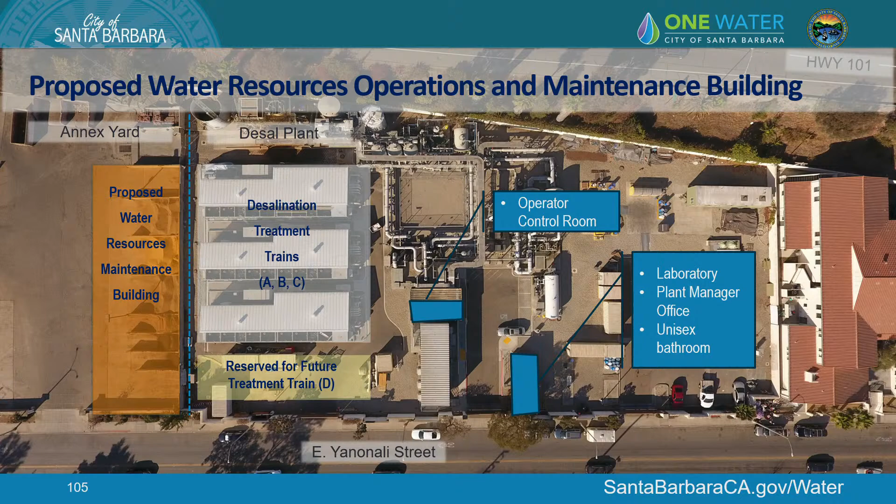Staying very high level here, the project is essentially broken up into 4 phases at this point. The initial phase that we're talking about today, as far as the contract goes, is an environmental assessment broken up into 2 phases: a site investigation and surveys in order to inform the second phase of CEQA and permitting.

Required for this building, following today's activities and ultimately going to council, we would be embarking on issuing a request for proposals for a designer in order to begin the process, to focus on the building design and then also get prepared for getting the approvals in place to build a building.

We expect the design to take probably up to two years, also to get all the approvals necessary for the building. We wouldn't anticipate construction starting until probably mid-2025 or early 2026, depending on how that design process goes. The construction of this building is heavily dependent on the funding.

As we just got done talking about rates in the city's, or the water resources needs for funding this building, we're looking at evaluating many different funding sources, everything between grants and some of the SRF funding that Mr. Hagmark talked about. We'll be working on that process, and we expect it to take probably up to 2 years to secure funding if we start now.

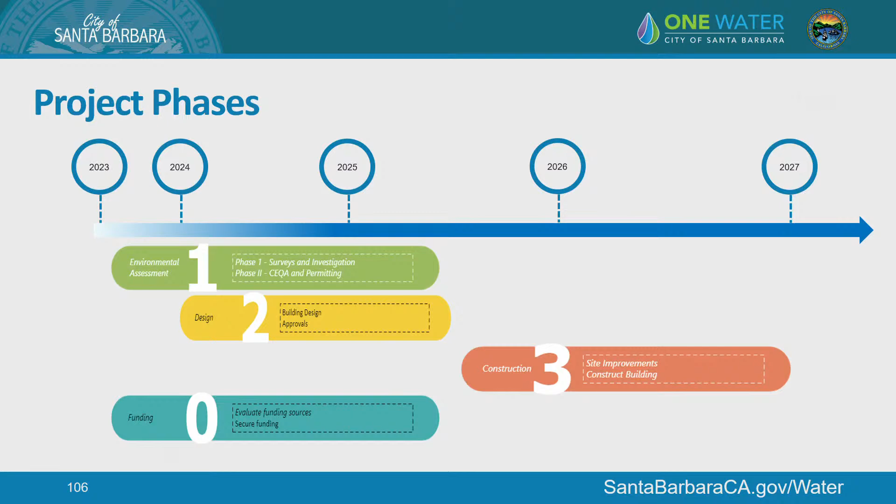So the item for the recommendation today is really this environmental assessment and permitting contract. City staff issued a request for proposals, and we received 5 proposals from many of our local environmental consultants. Through an interview process, we selected Dudek based on their approach and qualifications.

So we've broken this work up into 2 phases. The first one is a site investigation in order to really lay the groundwork for what constraints we're going to be playing with, not only for the building, but also for any work that needs to happen in order to move operations around on the annex yard to accommodate this building, and that will ultimately inform our designers on what we can do with the building.

The second phase will be the CEQA process and getting overall permitting for the building. The approach here, the assumption is that we would be getting an EIR addendum ultimately to seek CEQA approval. The building and the parcel itself is within the city's appealable jurisdiction for the Coastal Commission, so we have the ability to submit it and have the city issue the coastal development permit. Only if it's appealed would we have to go to the Coastal Commission for approval.

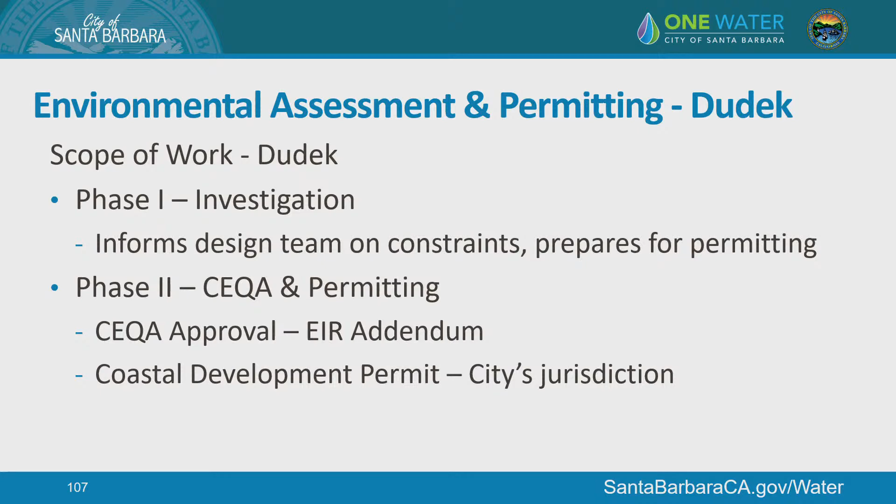This is undoubtedly the first of probably multiple stops with you all, and we intend to keep you all informed on the progress of the project. The first step starts with seeking recommendation of approval from you all for the environmental services contract with Dudek. Following approval, and authorization at council, if we move that direction, we would issue a request for proposals shortly after in order to begin the selection of a designer for the building.

And that concludes my presentation on the building and why we're here today. I'm happy to take any questions. Thank you. So any questions from Commission?

I had just one question looking at the timeline and the need for staff there. Are there any temporary reprieve locker room kind of options if we're looking towards a 2027 opening of this facility?

We've been working with the DBO contractor right now, in the 5th year of that contract, trying to understand their role moving forward. We've identified some temporary facilities on site to accommodate construction of the product water pump station upgrade project, providing additional facilities that haven't been there. But the intent is that they're temporary until we can make a determination on a future building.